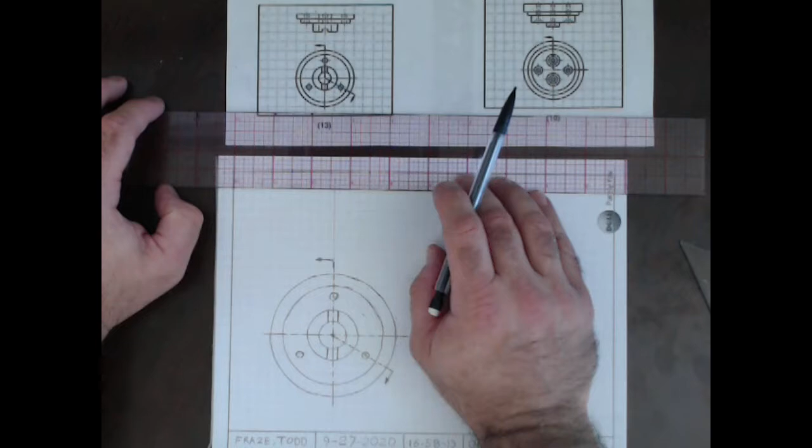Okay, we're going to first establish the back of the part. So we're going to come in a couple grids from the back and establish where we want the back of the part to be, and that'll establish all the spacing for this view and all the other associated views. So we just draw a horizontal line. Now that establishes the spacing for the part, and everything we draw should be forward of that line.

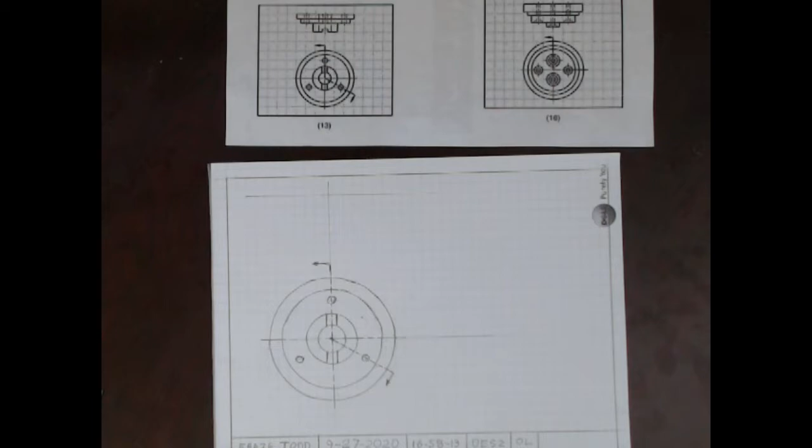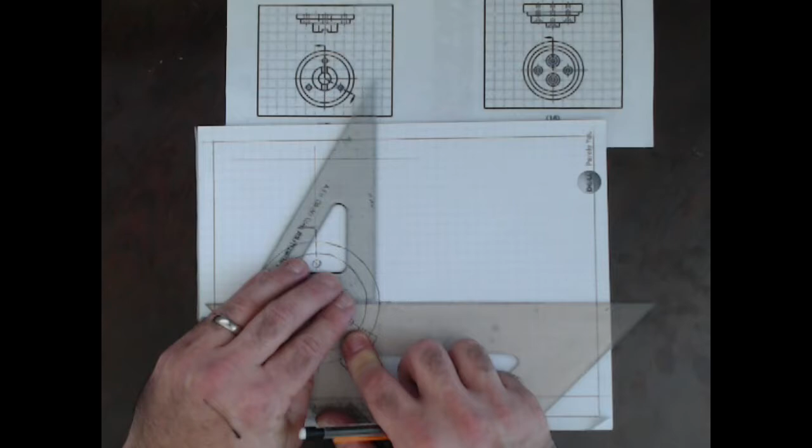Now we're going to use a technique with two triangles to project lines from the bottom view to the top view. The bottom triangle, I'm going to try my best to hold it as still as possible and use it as a sliding edge for the other triangle to slide back and forth and pick up on every visible edge. Some people use a different technique where they'll draw just one portion, but I prefer to do all the visible lines first. This first line establishes the left side of the part view. Then we pick up on each subsequent line that intersects our triangle that would be a visible feature and transfer that up to the top.

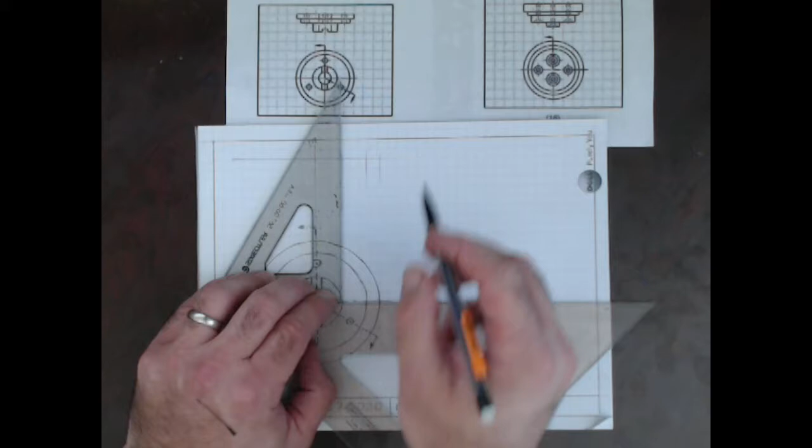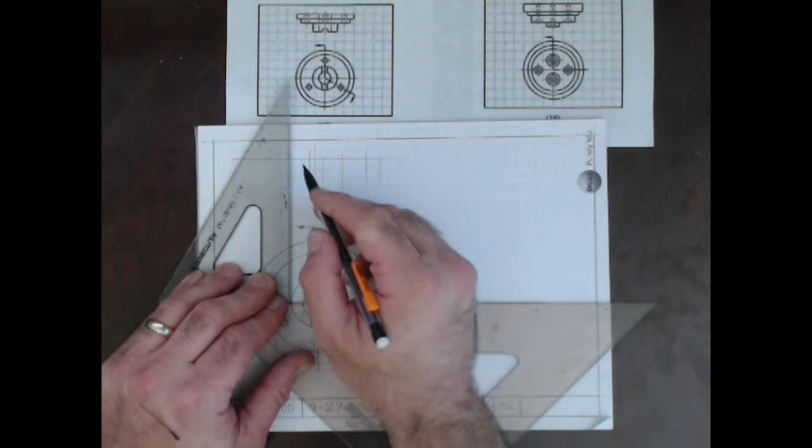So now we're moving on to the slot, and the other side of the slot. Then we're on the opposite side of the boss. The small diameter on the flange. And then the outside diameter of the part, which gives us the opposite end of the overall length of the part. So we have all the visible lines transferred.

Let's erase the tails we've got here that we don't need.

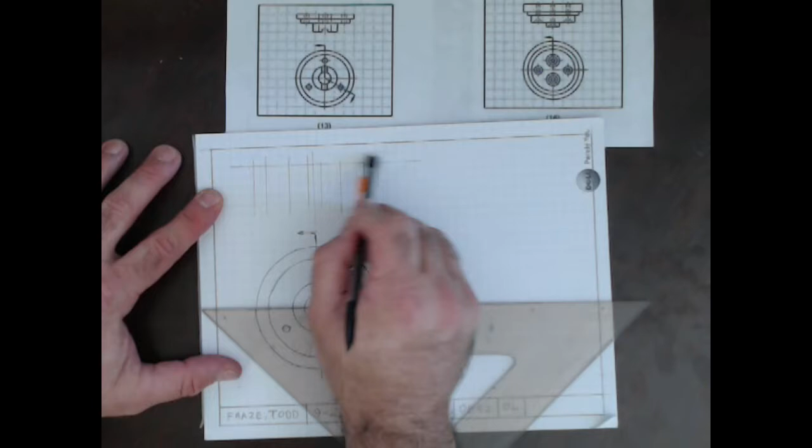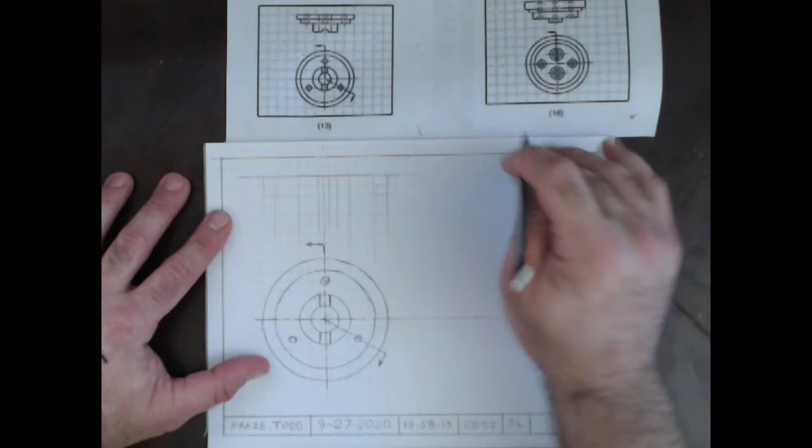Okay, so now we can start measuring from the back of the part to build the height. Remember, we have a scale of 2 to 1. So it looks like the outside flange is about half a grid line in our example, so that makes it one grid line on our paper. And then we jog over one grid line and up another grid to get the small diameter of the flange.

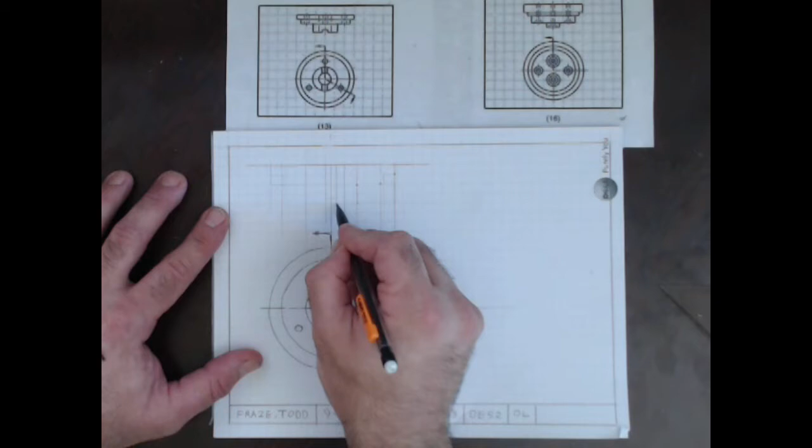I'm going to make a series of dots where they intersect with our projection lines, and we can more or less connect those dots to get the outside visible profile. I'm putting the gap in the depth of the slot and continuing on with each subsequent intersection. So if we were to connect that series of dots, we would have our part profile.

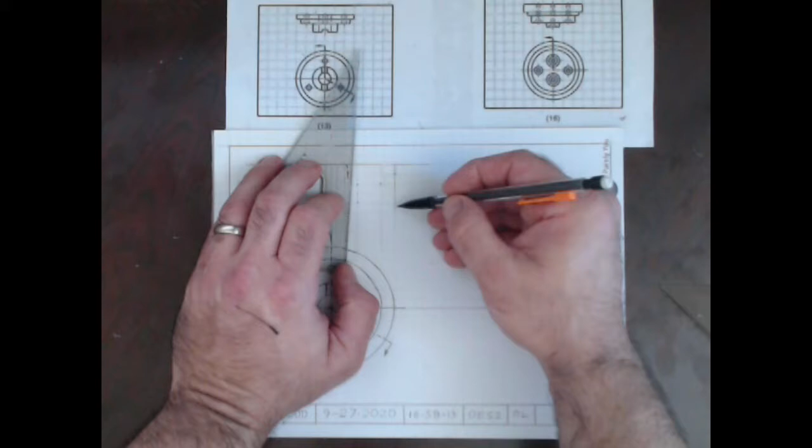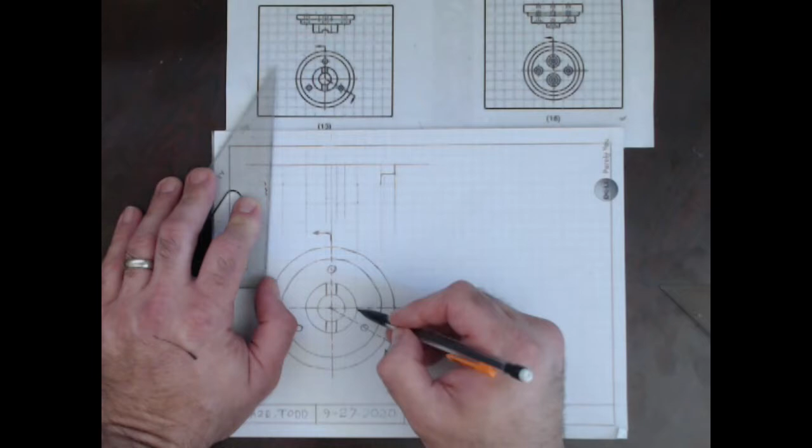Starting with the outside edge, then I'm moving over to the next point. Got the horizontal edge and then the vertical edge, which is in plane of material, which is the corner there. Now we're going to go to the corner of the boss. We go horizontal and then vertical. And that makes the overall height of our component.

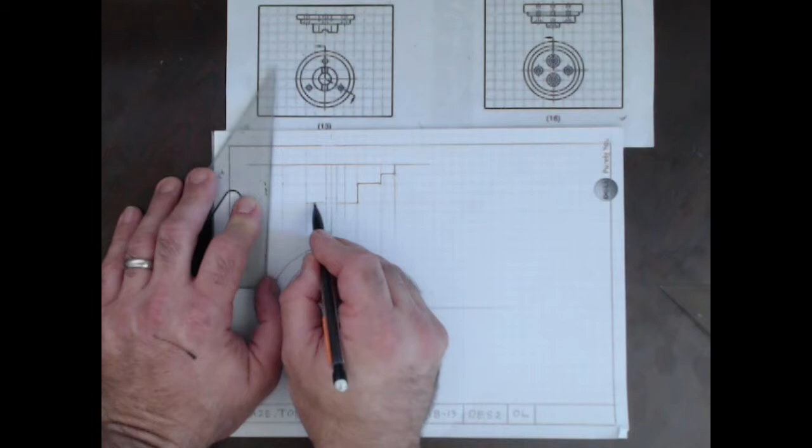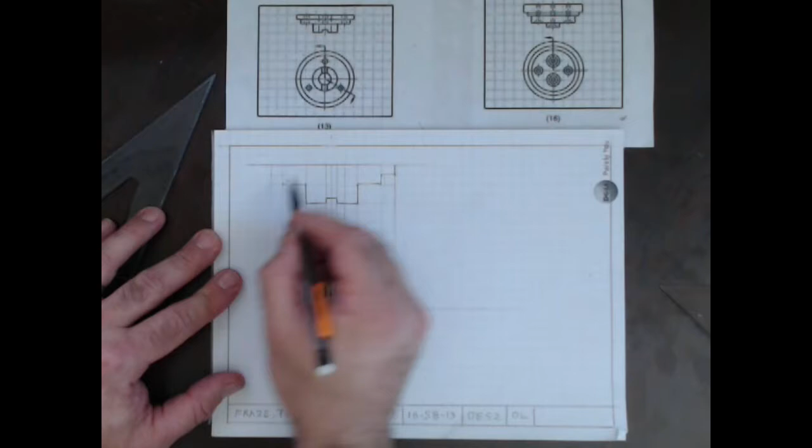Now we're going to draw a line across the face, leaving a gap for the slot based off the projection lines we made. We detail out the slot following the grid of lines we've made. The other side of the boss, the horizontal plane of the flange, and the step down in diameter to the outside diameter. There we go, you have your outside profile.

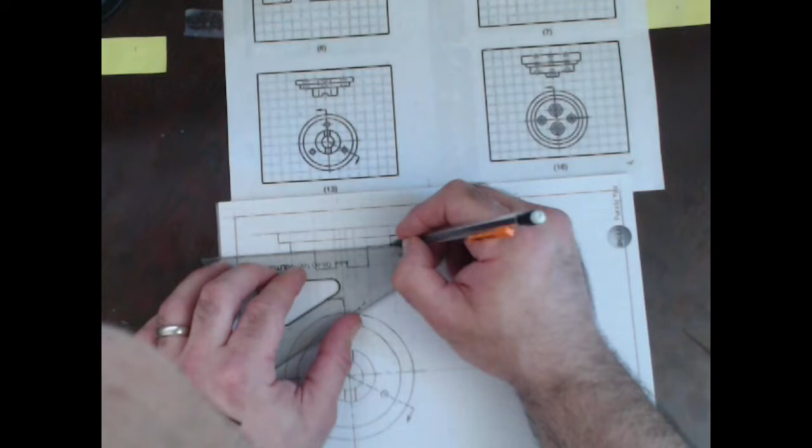We do have some visible lines of edges of the flange, and oops, I hit my camera. Whose head is in the way there? And then we got the top edge of the smaller diameter of the flange. There we go. We have all the visible edges.

Now let's do some erasing of construction lines.

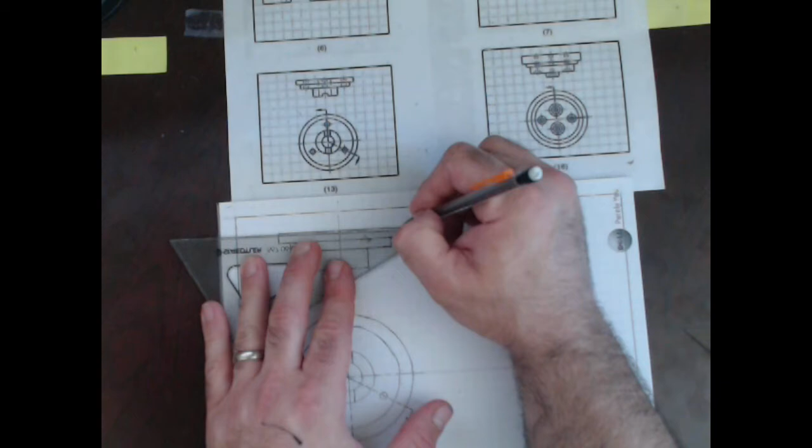Okay, so now I'm going to put in, just crisping up the construction line for the center. Next I'm going to darken up the construction line on the back so that it's consistent with the sides. So there's all our visible edges, and we should have the profile of the part established.

Now it's time to move on to the hidden lines, which are the 3 bolt holes and the center bore. So we're going to set up our triangles and project those from the bottom view.

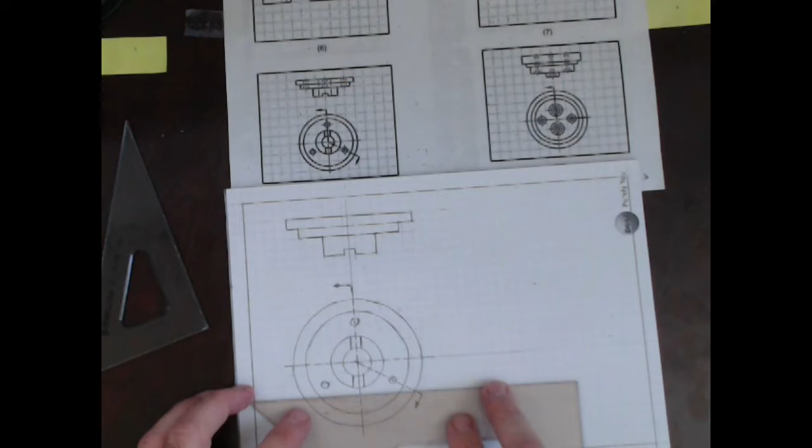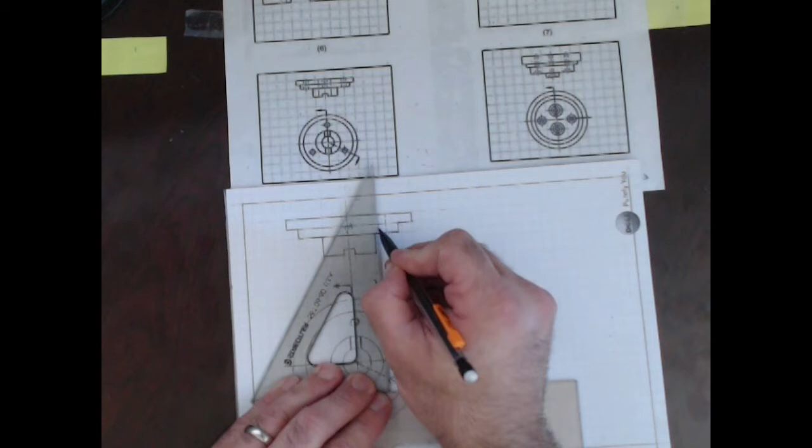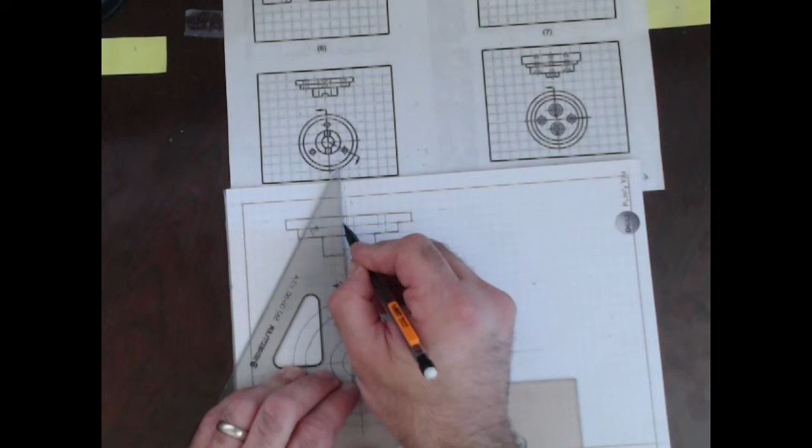Okay, we're going to start with the farthest one. I'm right-handed, so it makes it easy to move from right to left. Okay, now we've established the hidden lines for the first bolt hole. Moving on to the second bolt hole. Yeah, broke a lead. Okay, second bolt hole for the flange is completed.

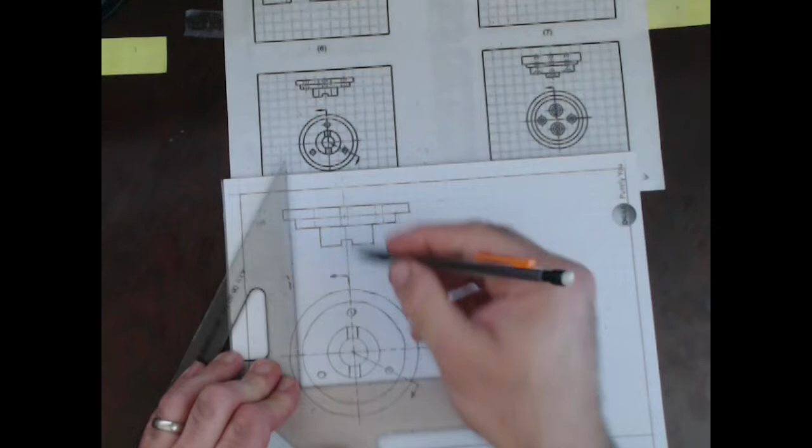And now we're going on to the third one. Alright, so now let's do the bore in the center. We have 2 lines to project for the bore, and that goes all the way through the part. One side is established, and now the second side.

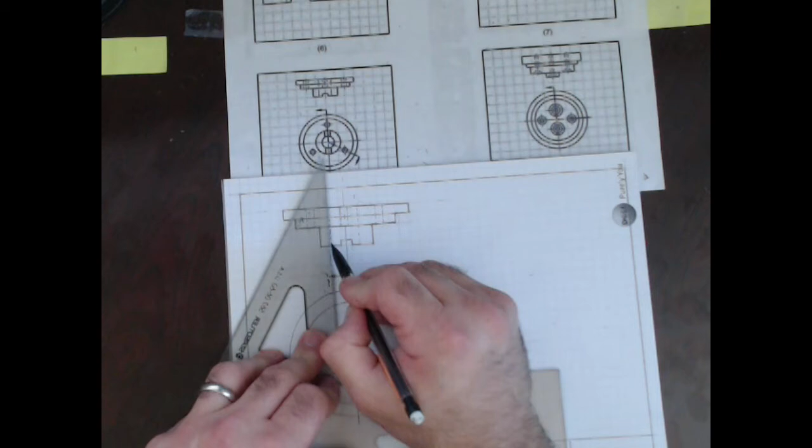Okay, crisping up some of those lines. Now we have the outside view ready, and we're going to establish our center lines, and this view should be done.

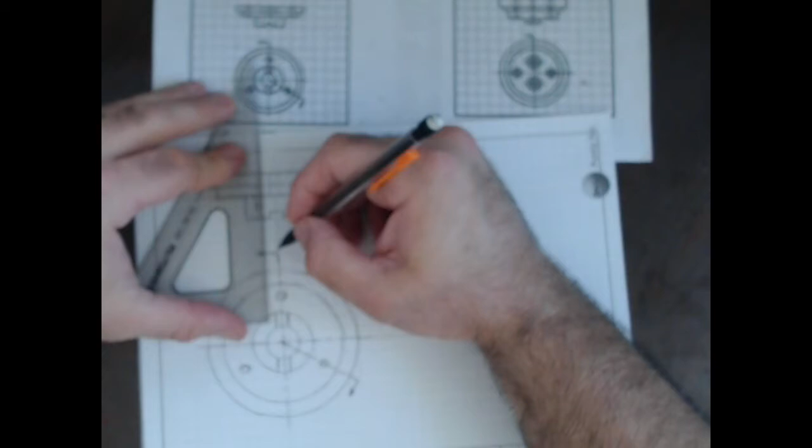So the center line should be a solid line with a dash towards center of the feature. We should have one for each series of holes.

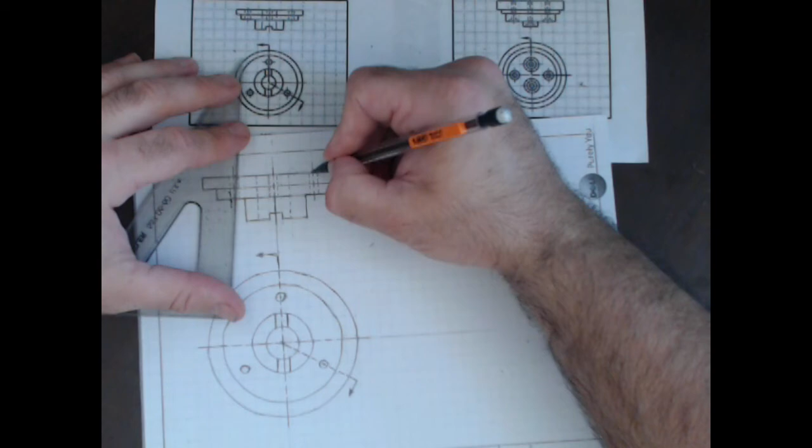And erase them off so that they're the length they should be in spec, and delete the construction line in between the 2 views.

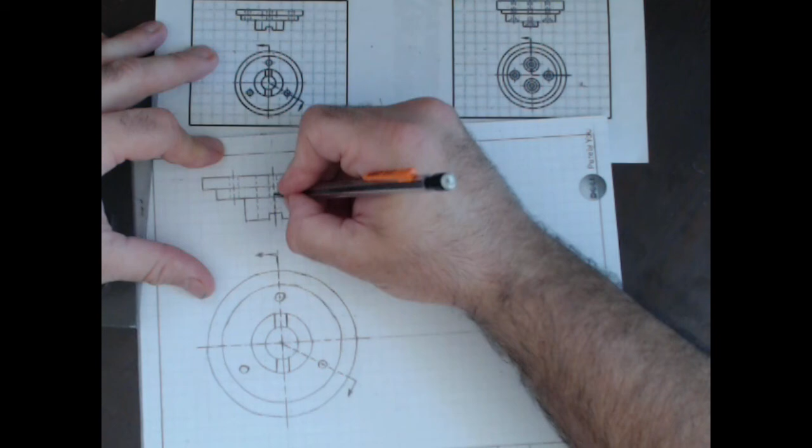Alright, we finished the top view. That ends this tutorial segment. So this is the end of part 2. Please continue on to part 3 for the actual section view.